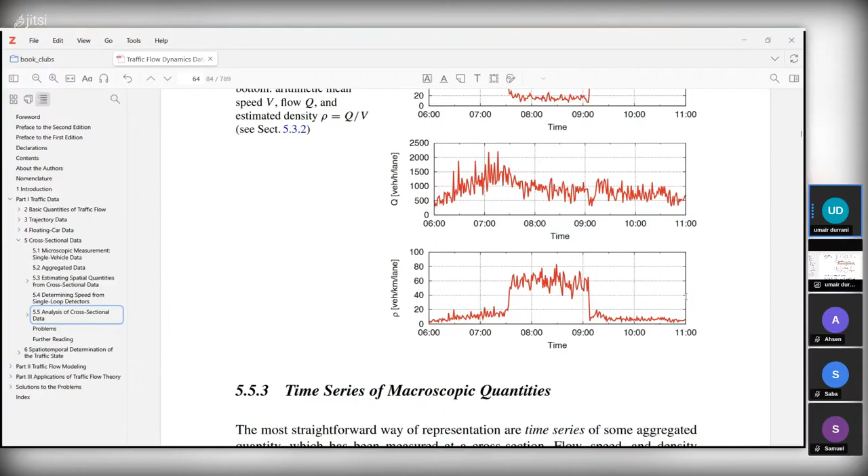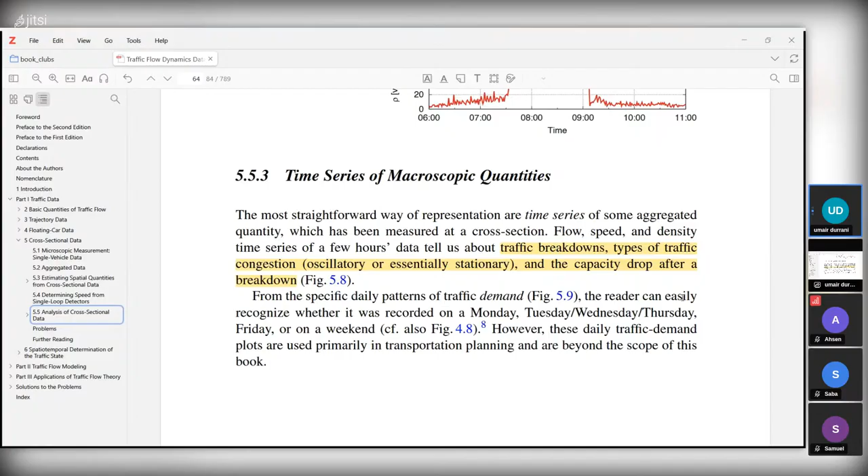So stationarity is, just to remind you, a concept from statistics where we are assuming that the distribution of whatever variable we are interested in is not changing over time. So for example, if the distribution is a normal distribution, we have two parameters, the mean and the standard deviation. And those two parameters are not changing over time. So the distribution remains the same. And in this particular context, we are talking about the variable of speed.

So in this section of the time series, we have these plots. On the top figure, we see speed over time, then the flow over time, and then the density over time. And we can see that there is a drop in the speed, a drop in the flow, and an increase in the density at this point in time. This is around 7:30 a.m.

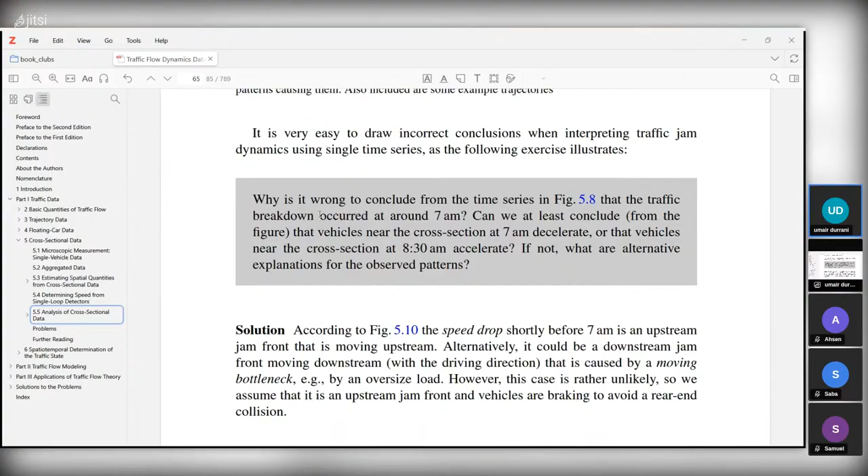So the question that is asked in this section is, why is it wrong to conclude from the time series in figure 5.8 that the traffic breakdown occurred at around 7 a.m.? So looking back, this is 7 a.m. And the question is saying, why is it wrong to conclude that traffic is breaking down around 7 a.m.?

So apparently, looking at just a single detector's time series of speed, flow, and density, it does seem that the traffic breakdown started around 7 a.m. And clearly at 7:30 a.m., there is a big drop in speed as well as in flow and an increase in density. So why is it wrong to conclude that?

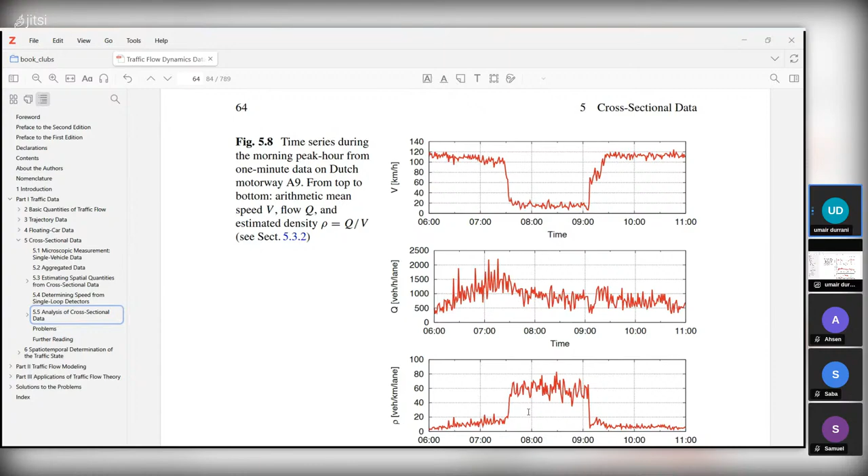It's because there could be multiple explanations of what is happening as well as where it is happening, both in time and in space. So if we have multiple cross-sectional data, so we have multiple cross-sections, loop detectors at certain intervals, and we get data from them at the same time, then we can compare what is happening upstream and downstream, and that tells us a complete story.

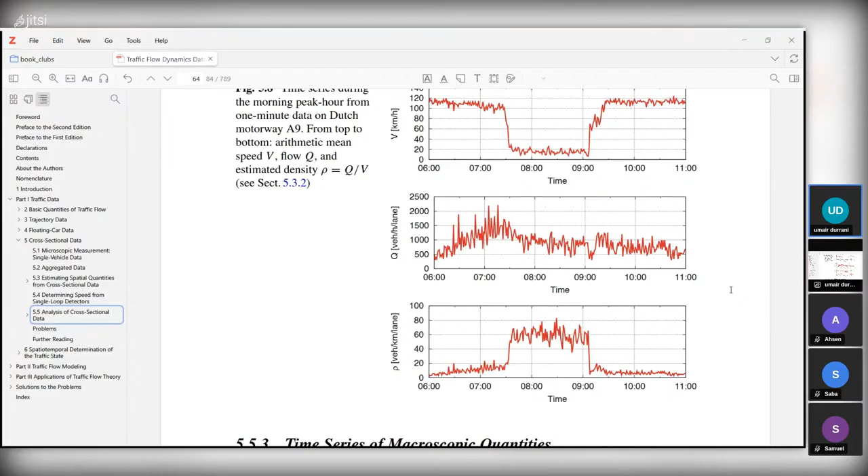Looking only at a single detector's data may be misleading, and that may mislead us into the conclusion that there is a breakdown starting at 7 a.m. So in this section, they have explained that there could be two possibilities. One of the possibilities is, although that figure above is about a highway, if we see the same pattern around an intersection, then one of the explanations could be this.

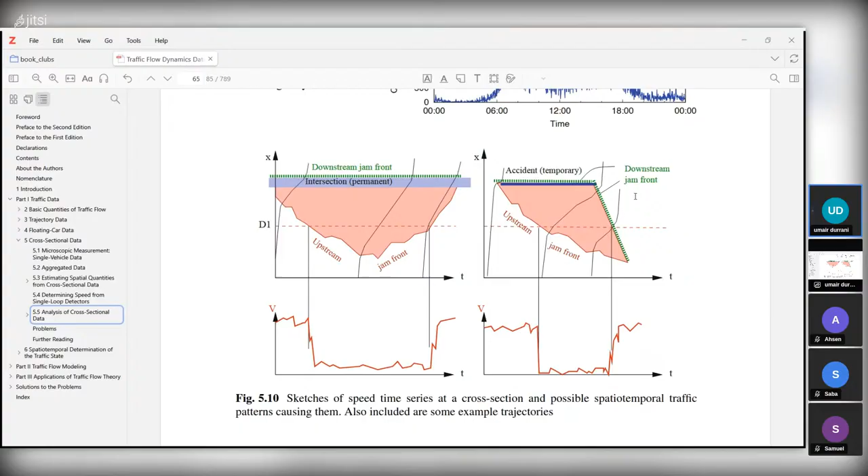Another possibility is if there's an accident, and this could happen either on an intersection or on a highway. And there, the problem is downstream jam front and then downstream congestion. And so if there's an accident, vehicles need to slow down. Or if there's a blocking vehicle, which is also mentioned in this section, that could be a large truck, which is slower than the cars. That is also creating a bottleneck, but it is a moving bottleneck. As a result of that, it will continuously increase or create the breakdown downstream as it moves. So there are multiple possibilities.

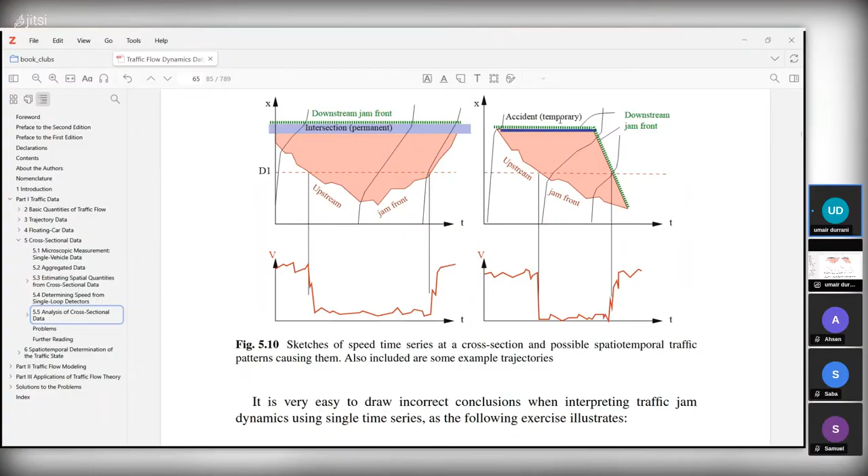This question was here as well. Can we at least conclude from the figure that vehicles near the cross section at 7 a.m. decelerate, or that vehicles near the cross section at 8:30 a.m. accelerate? If not, what are alternative explanations for the observed patterns? So we have seen the alternative observations. One possibility is that there is an intersection and there is a downstream breakdown, and that is moving upstream. The second possibility is the same thing due to accident, or another possibility is that there's a moving bottleneck, which is like a large truck. So in that case, the breakdown will happen downstream and continue to happen downstream. So this is what is explained in the solution here.

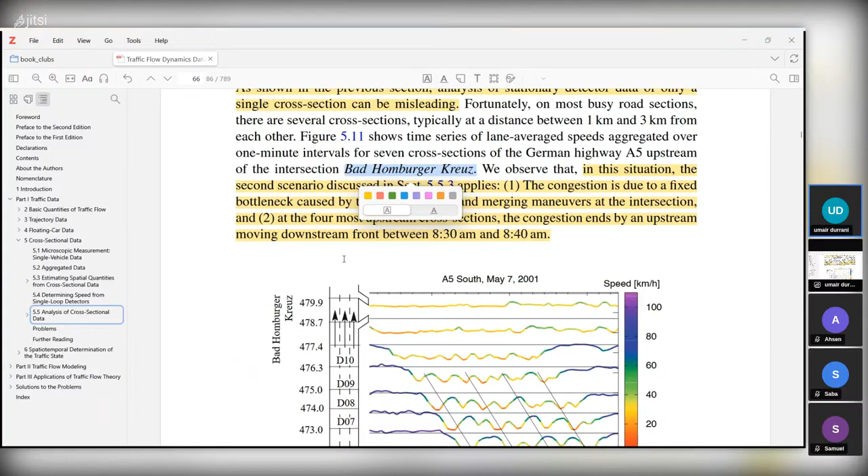And later in this section, spatiotemporal analysis, they explain using multiple detectors. So previously we only saw one, but now we have these 4 detectors, which show that there is this roadway where there's merging traffic here. Downstream of that, there is an intersection, which is mentioned right here. This is the name of the intersection. And so because of that intersection and because of the merging traffic, vehicles would change lanes and there will be some congestion and traffic breakdown. That traffic breakdown is clearly seen here as detected by these detectors.

In the beginning, there is a higher speed. So these purple speeds are around 80 to 100 kilometers per hour. And then they break down. But if you look at the minima of each of these time series, we see that they're moving in time. So this is happening at 8 a.m. when there is a slowdown observed by D10. And then here at D07, this is happening at around 8:10 a.m. So that is moving in time. And so if we connect them, we get these lines. And these represent the negative speed, also called the traffic wave, the speed of the traffic wave, which is happening due to these breakdowns. So that was the actual explanation of the question that was asked in the previous section.

Any questions or comments at this point? Yes, I have a question. So the breakdown starts at D10 at around 8 o'clock, and then it arrives at the detector D07. This seems like around 10 minutes later, right? So this is quite a long time for a breakdown to propagate. What could be the explanation for this?

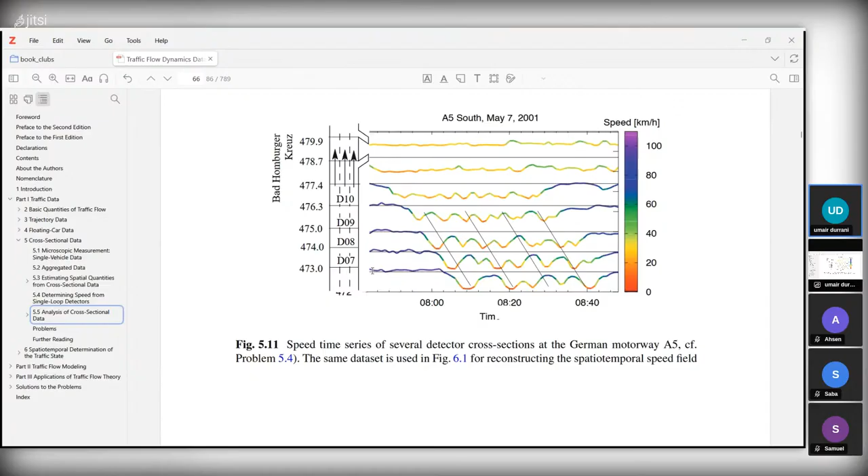So for example, if we talk about the detector D07 and D10, which are labeled here, and we are only looking at these two time series. So this is for D07 and this is for D10. For these two time series, we have multiple data points, as we can see in the figure, and we can estimate the correlation for these two detectors' speed. So that is represented by K for one detector, for example. That could be D07 or D10.

So let's say K is D10. So that is the time series of the macroscopic speed. In this case, it's the arithmetic mean speed. And then we also have the time series of the other detector. In this example, that would be D07. So we have D10, D07, their speed time series, and then we are finding their correlation. So if we use this correlation coefficient, that tells us the speed cross correlation function that can help us determine the wave velocity.

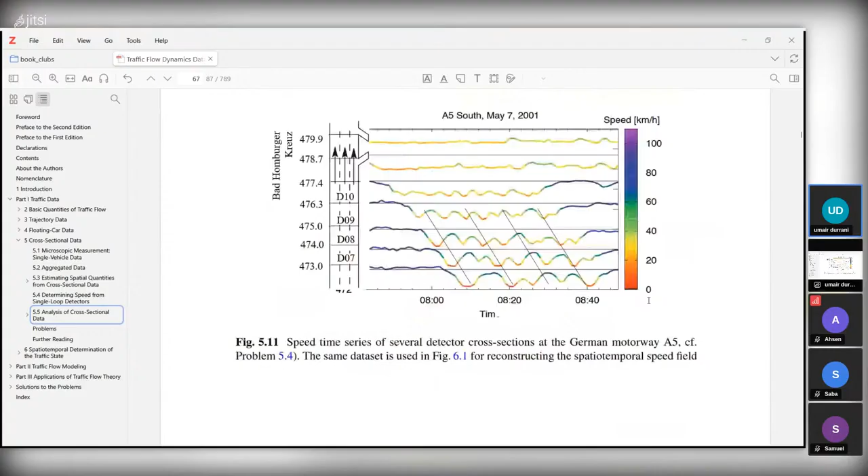Another way that they've shown here is this formula where we look at the distance, delta x_kl, and the time. For example, let's look at this one. So for D10, this is around 8 a.m., just before 8 a.m. And this one, the minima here is at almost 8:10 a.m. So the difference between them in time is 10 minutes. The difference between them in distance is 3 kilometers.

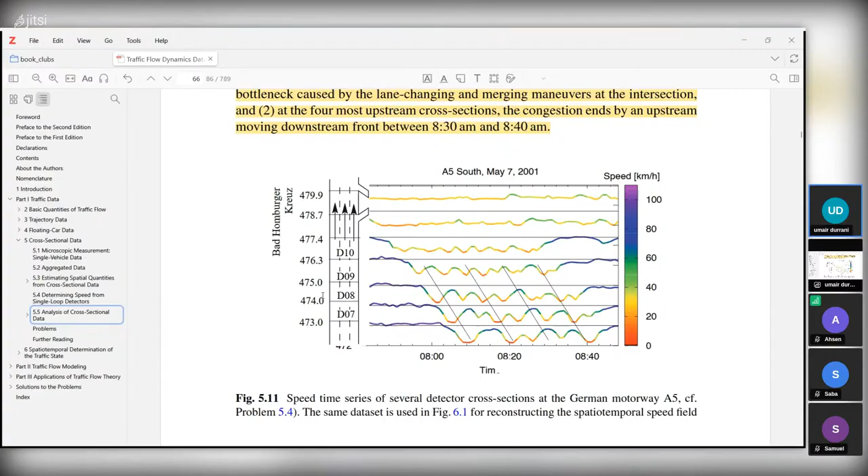So if we plug in those values, for delta x it's 3 kilometers. For tau, that would be the 10 minutes or so. That would give us the wave speed, the speed of the traffic wave. And here they define delta x_kl as the distance between the detector stations.

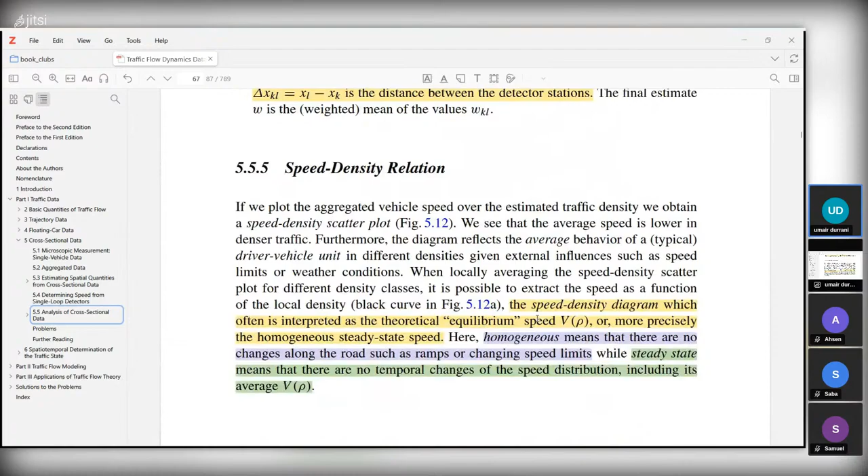I think there is an example here as well. Let's see. I think they mentioned problem, or maybe it comes later.

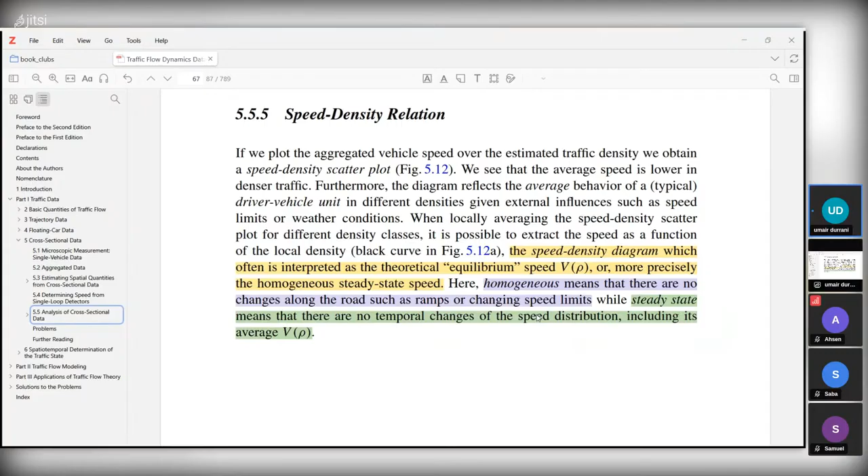Anyways, so next section is about speed density relation. And this is what contributes to the fundamental diagram discussion. So speed density relation is about these plots. So let's look at this one first. I'm going to zoom in, and the x-axis here is density, and the y-axis is the macroscopic speed.

Now, this macroscopic speed, again, is the arithmetic mean speed, which means that you have a detector. On that single detector, for a time delta t, for example, for 60 seconds, you count how many vehicles are crossing that detector, and also find what is the speed of each of those vehicles. We have previously discussed that that is available to us directly from the detector. So those are individual speeds.

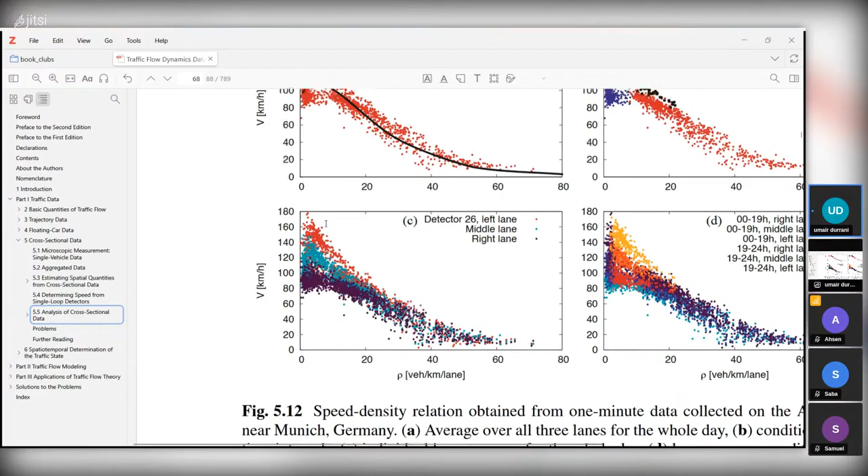If we take all those speeds and then take an average of those speeds within the observation of 60 seconds, that will give us a single data point of macroscopic speed. And if we then estimate density using the previous discussions we had on estimating densities, it could either be flow divided by this macroscopic speed v, or it could be flow divided by the harmonic mean speed, depending on the stationary versus non-stationary conditions. We have different formulas and we discussed them in the last session.

So once we know what density is, which is also a macroscopic quantity for those 60 seconds, and we also have this macroscopic speed, we can now have individual data points representing those, and we can then plot them.

So these red points represent all those points. These are averaged over all the lanes. And this is, in this case, particularly for detector number 26. And then there's this black line, which is fitted on these data points. The black line is not coming from the data. It is just a model fit to the data.

So my question here is, what do you see in this line? What is it telling us? What is the pattern that you detect here? Any ideas? As density increases, the speed decreases.

Yeah, so as we see, as density increases, as properly put, the speed decreases, which, if we think about it intuitively, makes sense as there are more vehicles in a particular delta x. Their speeds have to be slowed down because otherwise we won't have as many vehicles together.

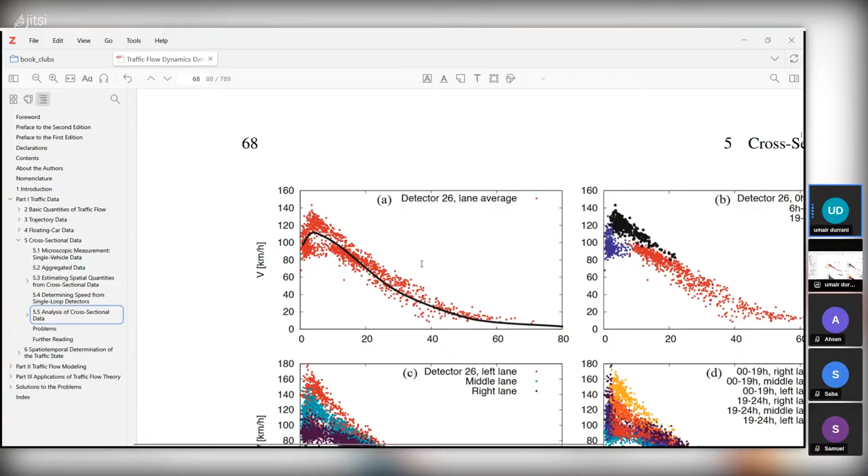Does that mean when density is almost zero, the drivers themselves are disciplined enough to not use the maximum speed they can? The maximum speed comes later at a higher density. Why don't they go at the highest speed when there's almost no one on the road? So this is a question that, looking only at this plot, would come up. The explanation is on the right.

This is showing us the breakdown of the same data points using the time. So we have 0 to 6 hours represented by these purple data points. Then we have 6 to 19 hours, which means 6 a.m. to 7 p.m. in the evening. These are the red data points. And then 19 to 24 hours are the black data points.

So here we can see that there essentially are two clusters of the speeds on the same range of density. We see some of the speeds are just above 80 kilometers per hour, and some of them are at 100, some of them are just above 100 and 120 between them. So these represent, as the chapter explains, the speeds of trucks and cars.

And for the other two data points, we see the same pattern as discussed here. As density increases, the speed decreases. Only in this part, we see this kind of cloud, representing vehicles moving at their desired speed. So they don't really have a correlation with density here because density is very small, so they don't really care. They go at their desired speeds, and they're limited by, obviously, the speed limit.

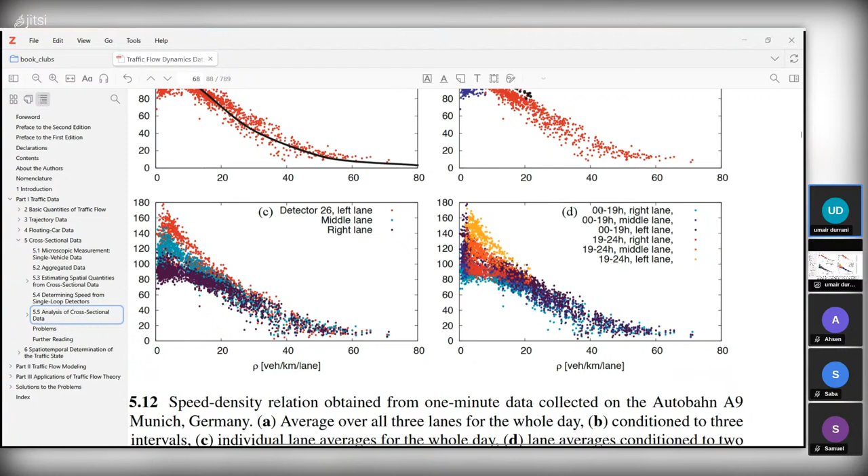This line that we see here, when we are not discriminating between the times when the data points were generated, this line is called the speed density diagram. And so this is a theoretical equilibrium speed, which we can determine using, so this complete plot is not the theoretical equilibrium speed, sorry. This part where the speed is decreasing, this would represent the theoretical equilibrium speed.

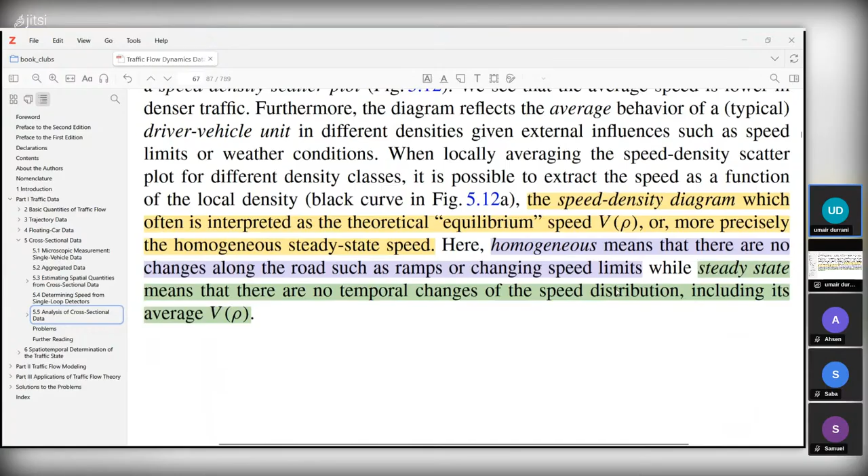And the whole line here, the black curve, this is the speed density diagram. So let me read this so that it is properly mentioned. The speed density diagram, or I should read from here. When locally averaging the speed density scatter plot for different density classes, it is possible to extract the speed as a function of the local density.

The speed density diagram, which often is interpreted as the theoretical equilibrium speed, V of rho, or more precisely, the homogeneous steady state speed. Now they have defined what homogeneous means and what steady state means. Homogeneous means that there are no changes along the road, such as ramps or changing speed limits. So essentially, the road geometry remains the same. And steady state means that there are no temporal changes of the speed distribution, including its average, V of rho.

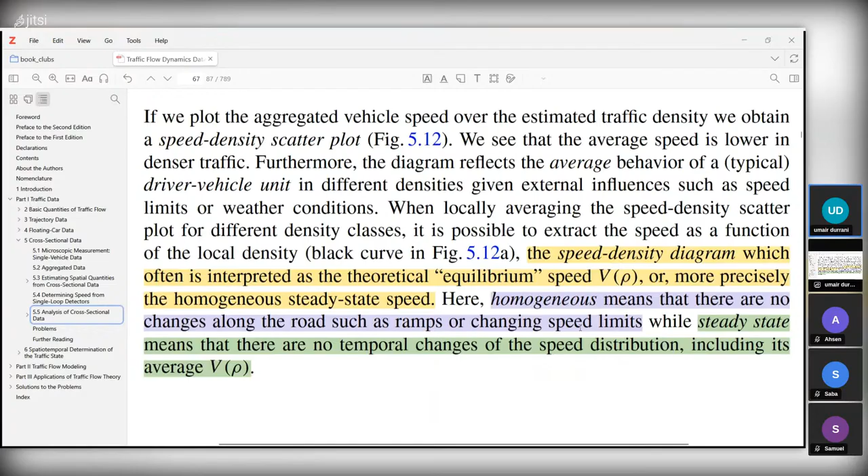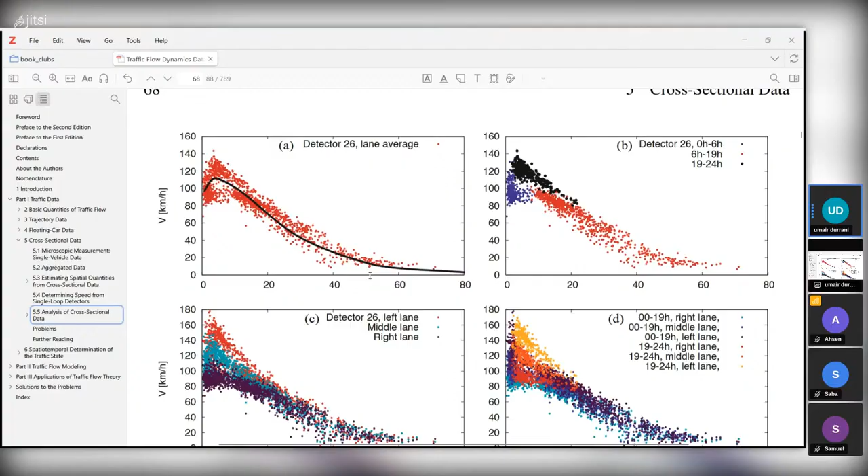So this definition of steady state seems to me the same as the definition of stationarity, which is a statistical concept. But the concept of steady state is a traffic flow concept. So again, steady state refers to no temporal changes of the speed distribution. Speed distribution would remain the same. So this is why this black line is theoretical. This is just fit to these data points, and generally people have figures, which I'm sure we will discuss in the part of traffic flow modeling, where they have models that represent these lines using different equations.

Okay, any questions?

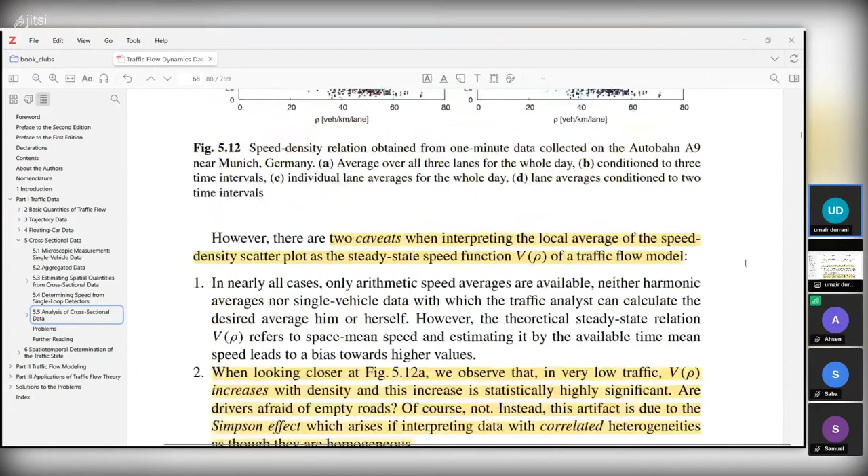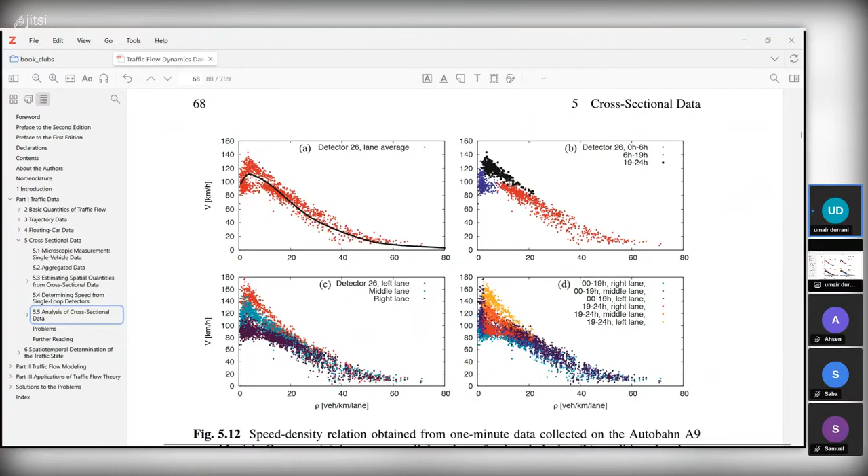One term that they have mentioned here is the Simpson effect. And so the Simpson effect is this thing where once we broke down the data points by time, we see a completely different pattern. That's what Simpson effect means in statistics. And other than that, they also mentioned that you can determine the desired speed from this when the density is very low. Then you would say that the higher speeds that you're getting here, those are the desired speeds of the drivers.

And this is also important that we conclude that speed density scatter plots depend on the vehicle fleet, which means the traffic composition. Other factors are regulations, variable speed limits, external conditions, which also includes weather conditions. And this also applies to flow density and flow speed plots that we are going to discuss next. So questions, any confusions?

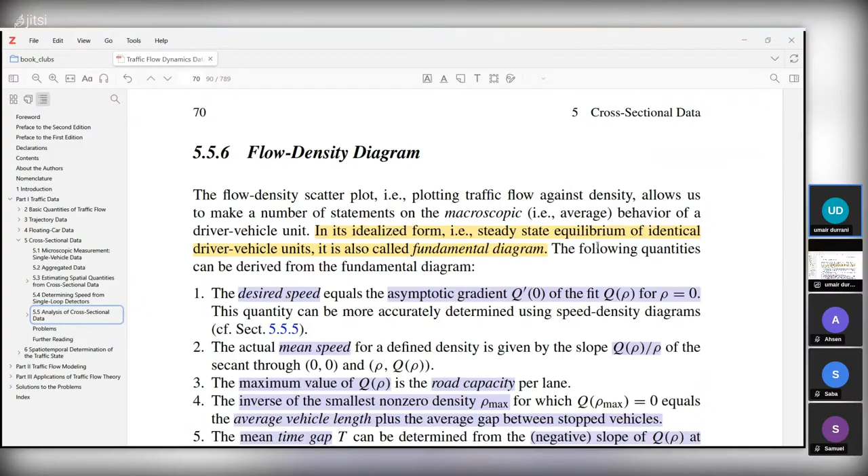Fundamental diagram would mean that your traffic flow contains identical driver vehicle units, which obviously is not possible in real life. And it also assumes that there is steady state equilibrium, which means that the speed distribution is not changing over time. It's remaining the same because everyone is going at the same speed, not accelerating at a given gap. They are at a given gap that they're keeping from the lead vehicle. They are moving at the same speed throughout. That would mean fundamental diagram. Which does not mean that the speed cannot change. The speed can change, but if the speed changes, it is changing based only on the gap that they're keeping.

And we can define certain things using these diagrams. We can define the desired speed, which is equal to the asymptotic gradient of the flow when density is zero. So when density is zero, we are right here, which means that we are talking about this free flow or free traffic branch.

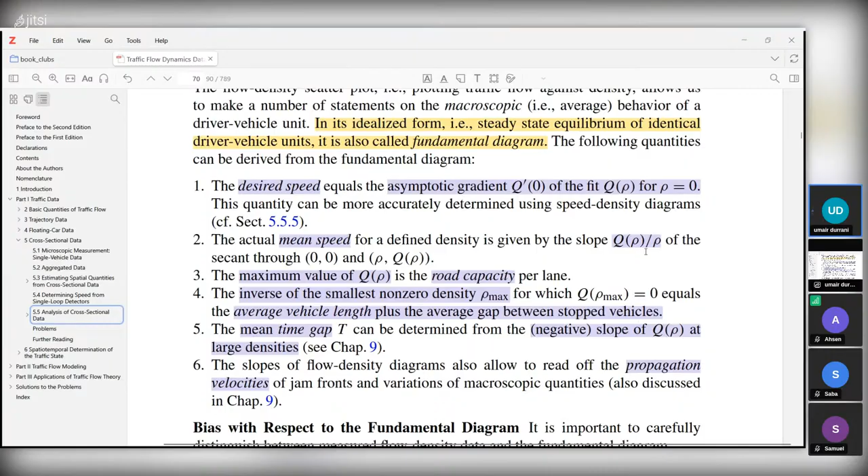If we take a slope of this, that will give us speed, because remember, density is equal to flow divided by speed. So if we take a slope here, that would give us the speed, and that would be the desired speed. We can also estimate the mean speed for a defined density by getting the slope again. For other parts of the plot, we can use this formula to get the mean speed.

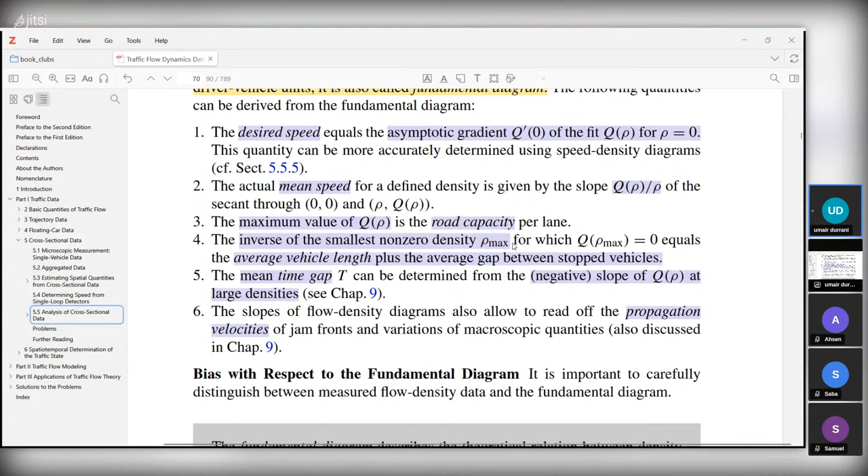And this represents, if you recall from our previous discussion, density is equal to 1 divided by average distance headway. Vehicle length plus gap is also equal to distance headway. So 1 over rho max then represents average vehicle length plus average gap. Okay. Any questions?

Okay, and then we can also get the mean time gap, capital T, which can be determined from the negative slope of the flow at large densities. Then the slopes of the flow density diagrams also allow us to read off the propagation velocities of jam fronts, but this part is not very clear in this section. So they are going to talk about both points 5 and 6 in chapter 9.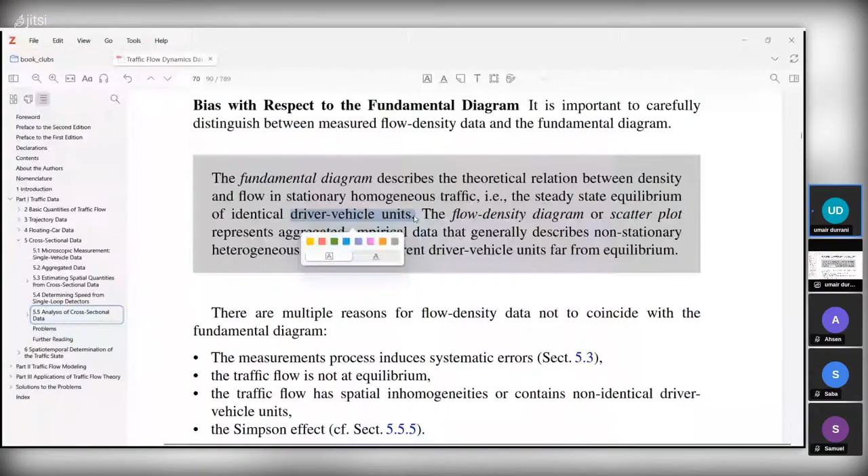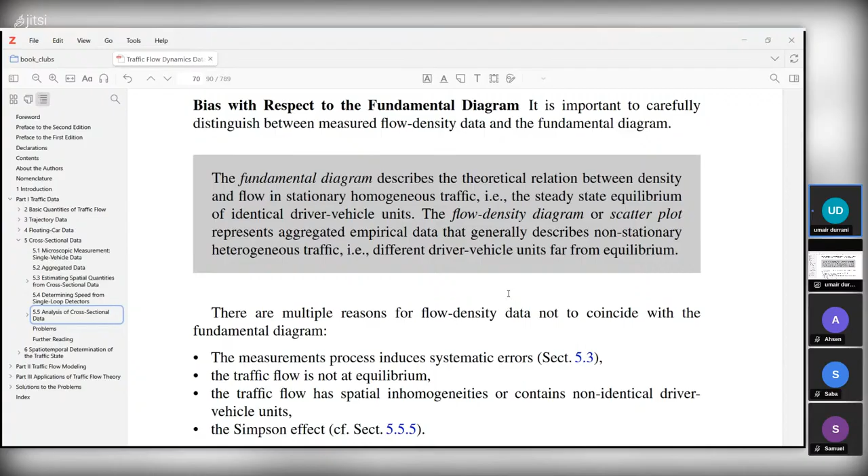The flow density diagram, on the other hand, represents aggregated empirical data that generally describes non-stationary heterogeneous traffic, that is, different driver vehicle units, which are far from equilibrium conditions.

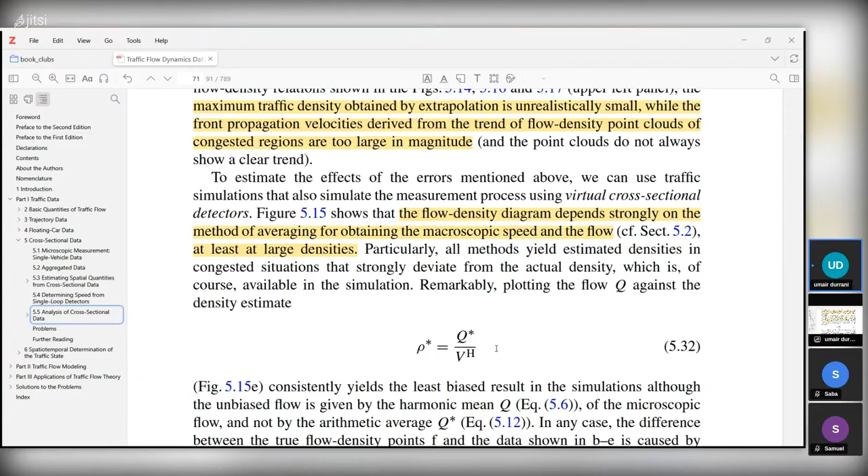They also mentioned that if you use the hydrodynamic relation of rho is equal to Q over V, there could be some bias. So instead, you can use this formula, Q star divided by harmonic mean speed. Q star is equal to 1 divided by the summation of flow, I think, the microscopic flow. We have previously discussed the equation for Q star. Let's see. Here is 5.12.

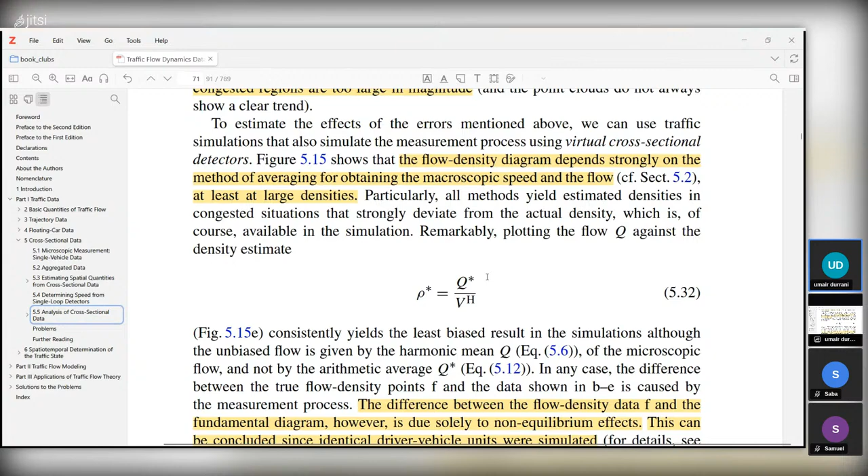Yeah, so this is the average of 1 divided by the time headway, or the average of the microscopic flow. So it's not a sum, it's the average of the microscopic flow. The easier one for me to remember is this one. It's the average of 1 divided by the time headway. So this, according to the discussion, is a better approach to estimate the density.

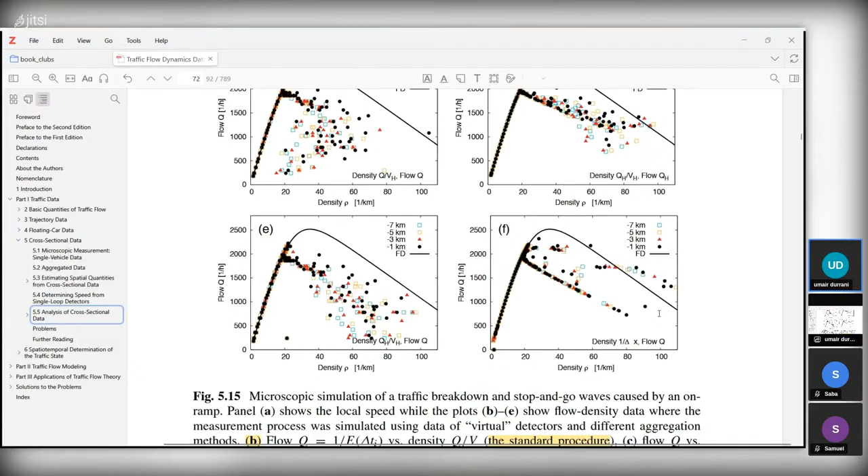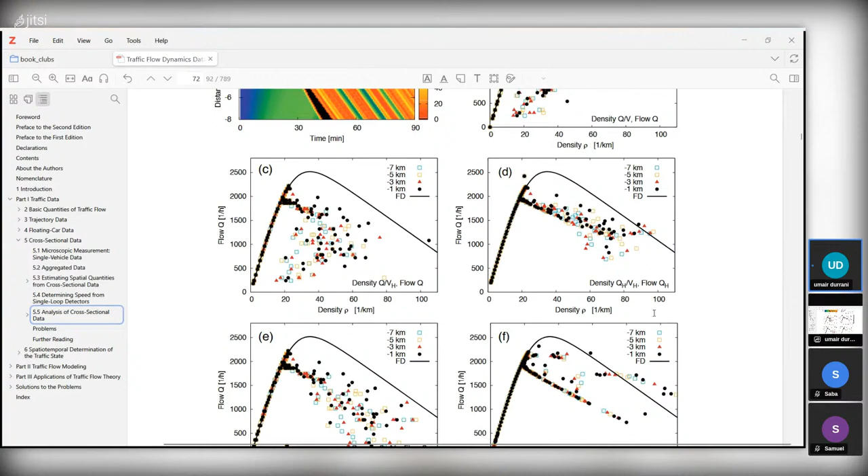Okay, so now we are in this discussion of using density and flow, so flow density plots, and this is simulating highway traffic. So how they generated these plots is from a simulation using their own software called MovSim. So let me now show you that. I'm going to stop sharing this screen and let's share the complete screen.

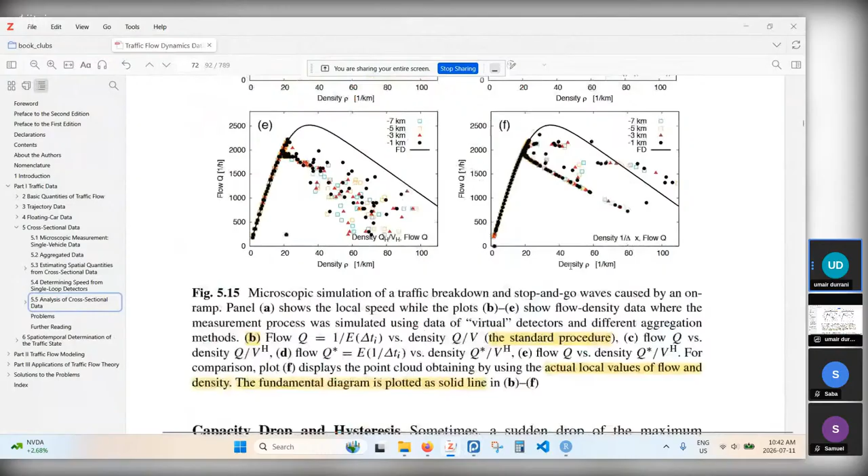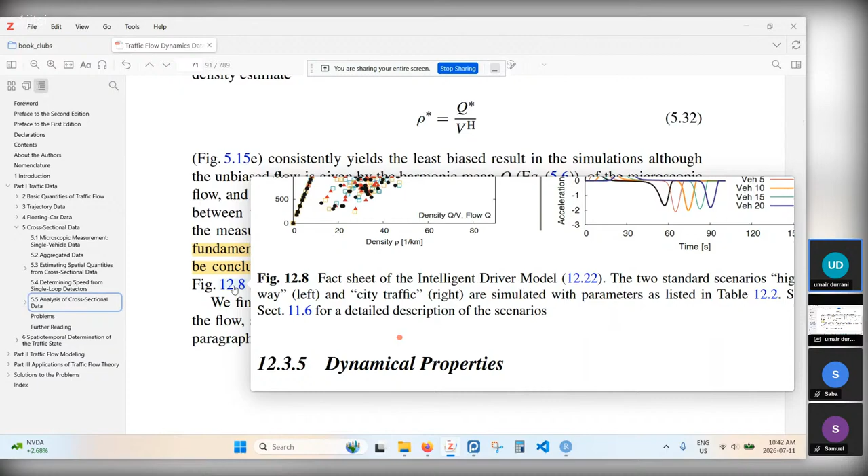So we tell it what files we want to run. So we want to run this file onramp_idm.xprj. And this is coming from, again, the book scenario simple on ramp. Let me first explain to you what that scenario does. So if we go to the figure 12.8, this is the result in chapter 12 for the intelligent driver model, and it's showing us a similar figure.

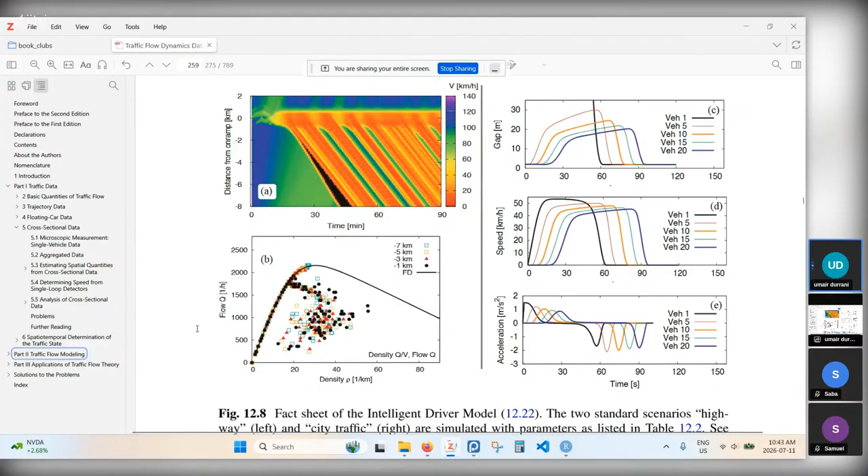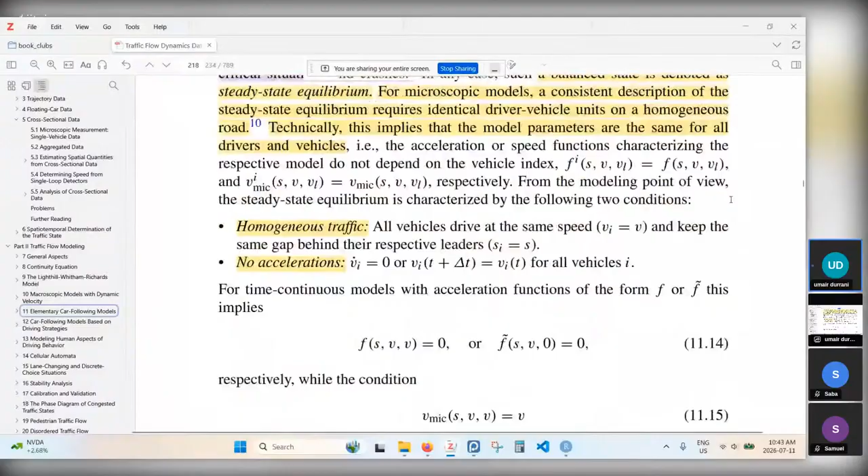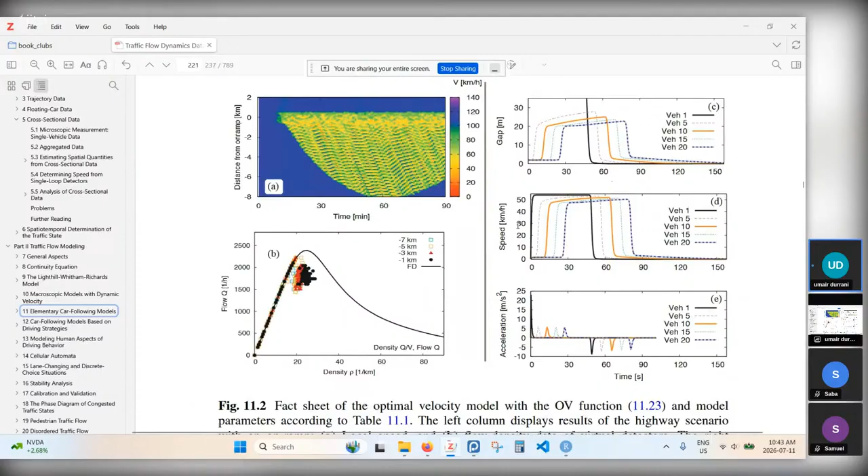And if we now go to chapter 11, this is where they have explained that particular simulation. So here, the fact sheet of dynamical model characteristics, they have this section highway scenario, and within highway scenario, they explain what the scenario is about. So in this case, they have lane changes allowed, which take place in 1 kilometer long merging zone of the on-ramp centered at x equals 0, right? So there is a long single freeway lane, and then there is a merging zone which is 1 kilometer long.

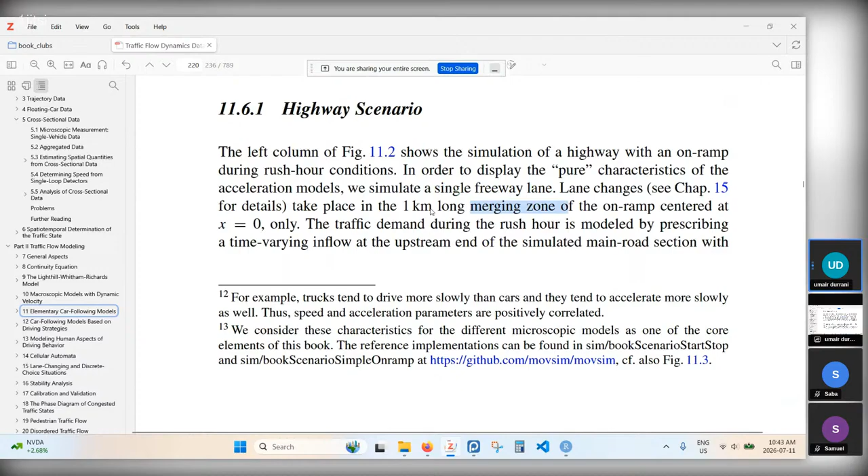And then the peak value of the flow is 2,200 vehicles per hour. On the on-ramp, the flow is 550 vehicles per hour. So it doesn't change on the ramp, but on the main highway, it does change. So how do we know how much flow there should be? That is provided in the file. If we go to onramp_idm.xprj, here we can see that it provides the flow at time 0, starting point. The flow is 200 vehicles per hour. And then at time 1500 seconds, the flow is 2200 vehicles per hour.

Initially, the speed is 30 meters per second, which is just below 120 kilometers per hour. And then it goes to 22 meters per second. And for the ramp, the flow remains 550 vehicles per hour. So we need to run this, and we need to run this in the same directory as MovSim. So I'm going to copy that here. I'm going here, go to the main MovSim directory, and then right click, click on open in terminal, and I paste that here, press enter.

So it's going to launch this GUI for us and start the simulation. If we zoom in, this is showing us this part. Interestingly, we don't really see the on-ramp here. And that's the choice that the authors made. Although they are simulating the on-ramp, physically we don't really see it in this simulation. So it takes some time to run it. You can see it here. Once this is complete, this progress bar would show that the simulation is complete.

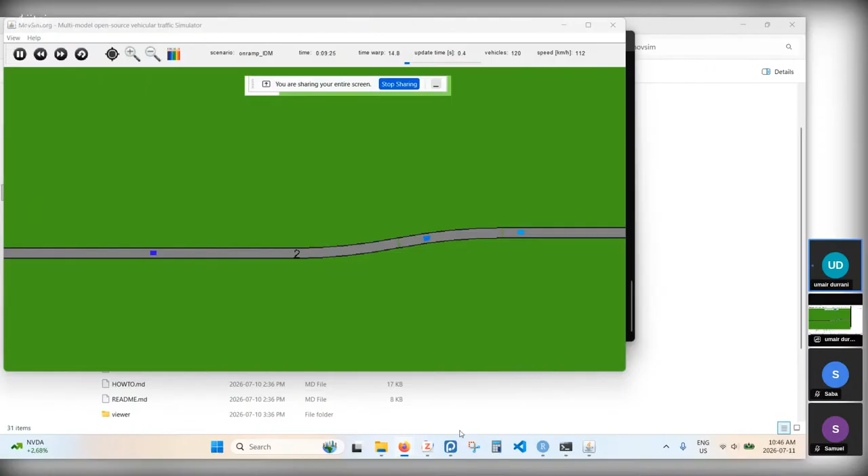And then once it is completed, it would then generate multiple detector data sets, because there are multiple detectors on that roadway upstream of the on-ramp. So they will be generated here. And once they are generated, then the authors use this file. All of these commands are the gnuplot commands that would use the data that I just showed you and then create the plots. So I've already done that. And after that, if I go to sim and then book scenario simple on ramp and then plots, this is where we can see those plots.

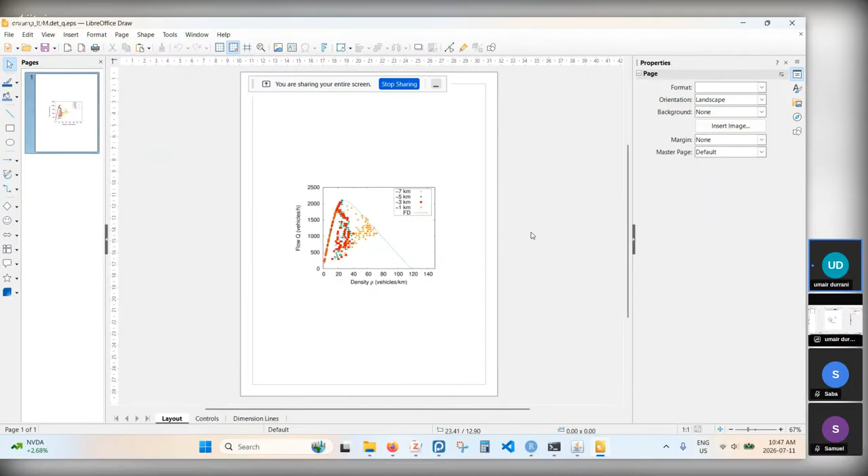I'm going to open this, but it should not be this one, but it's okay. This one also works. And let me zoom in. So this is what the plot shows us. Now let's take a look at what we saw in the chapter.

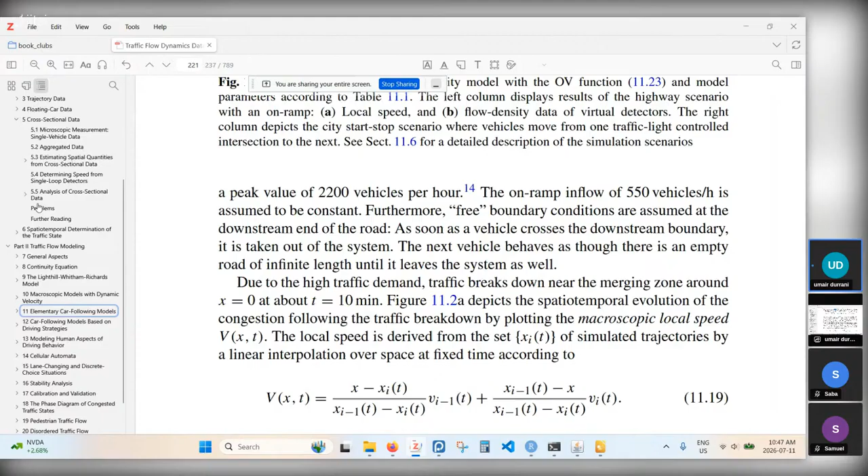So I go back to the analysis of cross-sectional data, and at the very end of this chapter, we'll see those plots right here. So the first plot is showing us time on x-axis and distance from the on-ramp. So 0 means that this is exactly on the on-ramp, and this is upstream of the on-ramp, and this is downstream.

And so upstream, because of the traffic, if you take a look here, we see that vehicles are slowing down a bit, right? As they're moving along the ramp, they're slowing down a bit. And over time, you will see even more slowing down, and this will become a bottleneck. So that is causing the upstream congestion. So the red and orange colors here represent traffic breakdowns.

The first one here is using the formula of flow of 1 divided by the average of time headways. That's the formula of the flow that is used on, sorry, y-axis here, and on x-axis we have density, which is estimated using Q over V right here, right? So the flow is defined like this. So that's the plot, right?

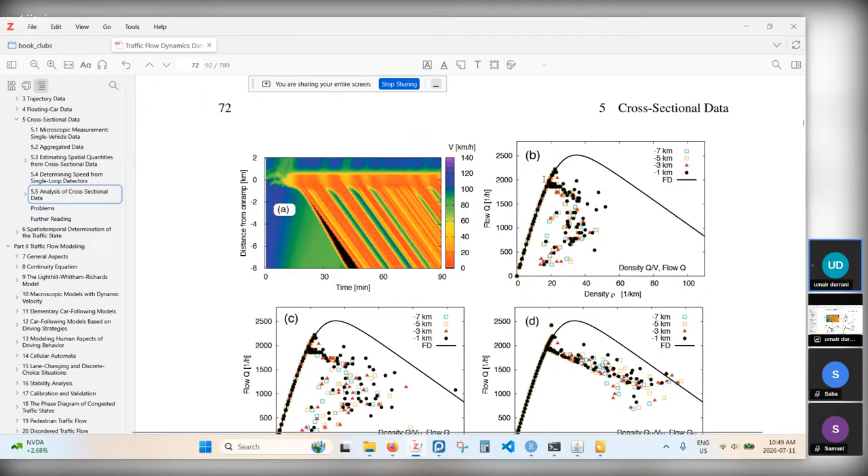But the actual data points, although plotted on top of the fundamental diagram in free traffic, in congested traffic are not even close to the congested fundamental diagram. Here we see these point clouds, and the maximum density they go to is less than 60 vehicles per kilometer. But these sets of plots also tell us that using different formulas for estimating flow and density will give us different results. You can clearly see these different results.

This last one here is directly from the detectors that are available in the simulation. This is the flow using the definition of flow, the number of vehicles at a particular location for a given unit of time. And the unit of time here is 60 seconds. The density rho is the number of vehicles in a kilometer, right? So this is directly available from the detectors in the simulation.

And these are making a very similar figure to the fundamental diagram. So we have the free traffic and then the congested traffic, this line. Yes, there are some outliers here, but I wouldn't say these are outliers. There are other point clouds here, but we see the clear pattern, just like the pattern in the fundamental diagram, although the density is smaller than what the fundamental diagram suggests.

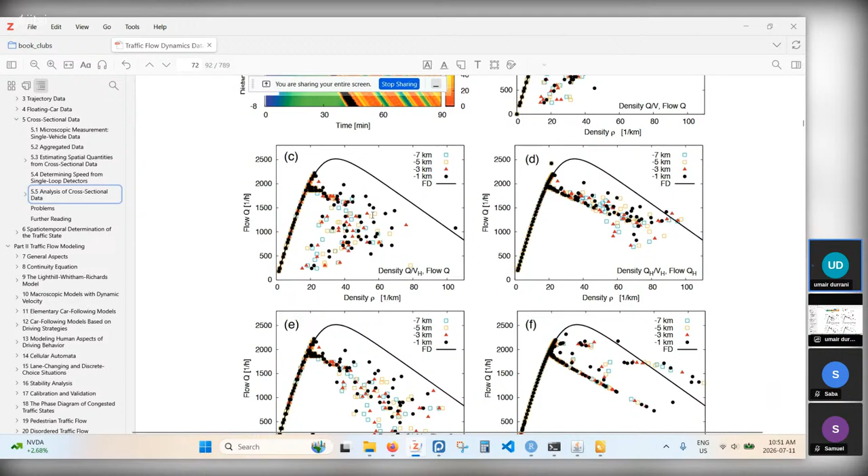But then in plot C, we have flow Q, again estimated as this formula, versus density using flow divided by harmonic mean speed. So this is C. This is what we get. A different interpretation here because the plot is different.

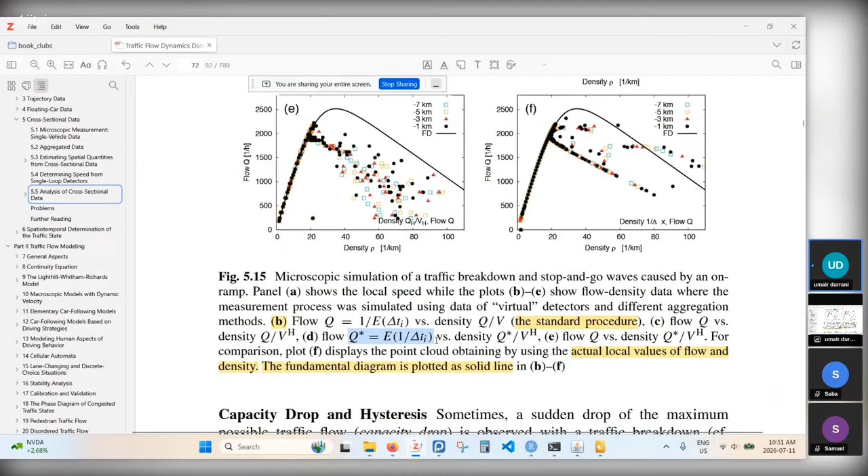In part D, we have flow, which is Q star. So this is the average of 1 divided by the time headways. And the density is Q star divided by harmonic mean speed. So that's D. Right? Again, a very similar pattern to the fundamental diagram. So this seems to be a good estimation because we're using harmonic mean speed, which we know is a better representation of space mean speed, and flow is also a better representation of the actual flow.

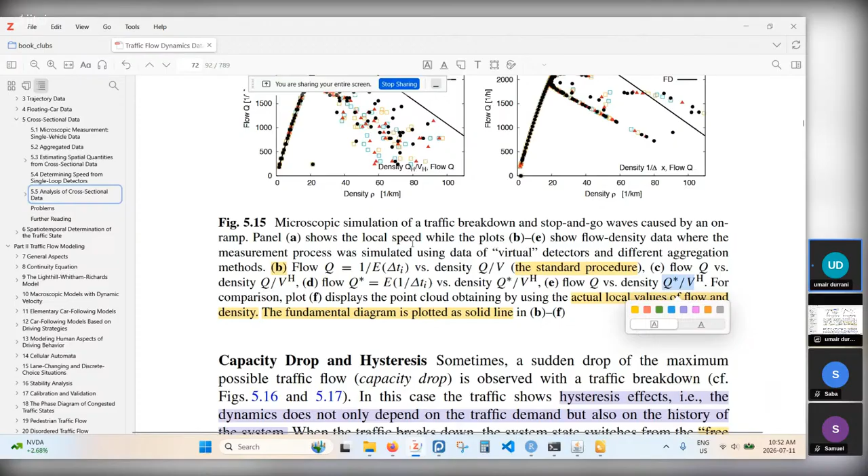And then we have part E, which is using the flow as this definition and density as Q star over VH. So every single one of these plots gives us a different result. So that's why it's important that we know exactly what definitions we are using for flow and density.

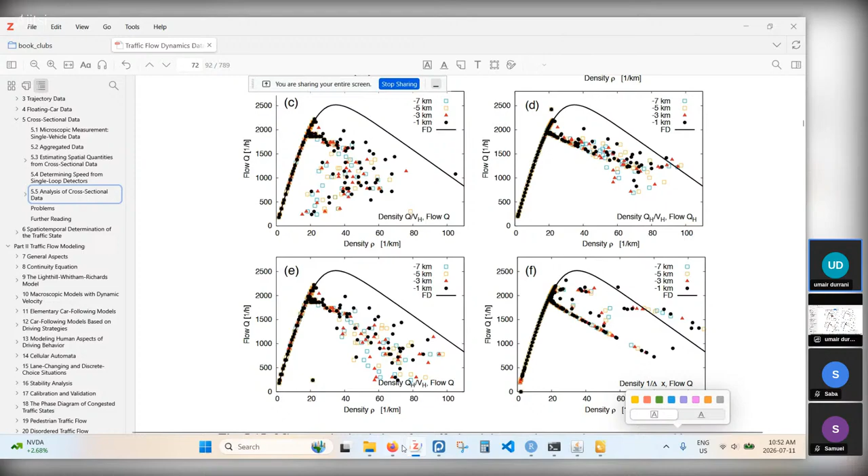And I have already emailed the authors as to why we see these differences. I have made sure that the IDM model parameters that we have used are the same as mentioned in the book. It's in table 12.2, I think, in chapter 12. So we are using exactly the same things, but we are getting somewhat different results.

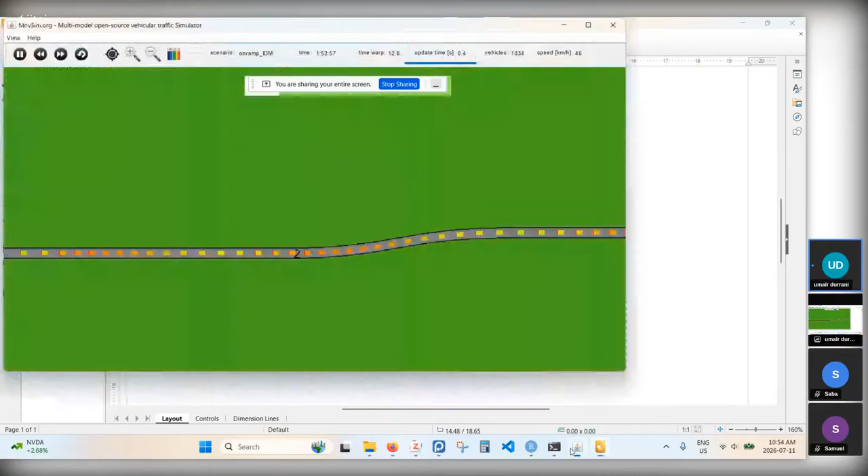The second part that I want to show is reproducing the same thing with SUMO, which I find much easier to follow because I can also see the network much clearer. It's unlike what is shown here where we don't really see the on-ramp. So I'm going to close this and it would automatically close this as well. And let's see if anyone has any questions first.

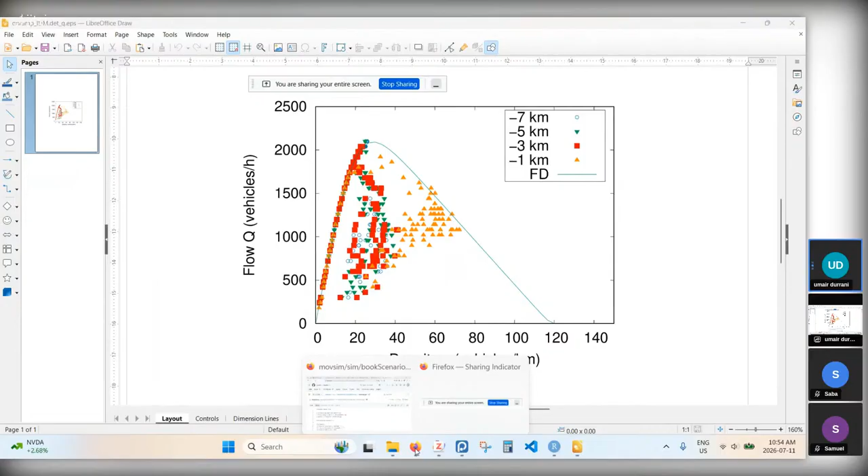To reproduce this at your end, you need to have Python installed. You also need to have the UV framework as a package manager in Python. Once you install UV, you can then just type uv sync in your IDE. So if I do that in the terminal, uv sync, it will install everything that we need from Python. And actually in this case we are not really using Python, so you can completely skip this.

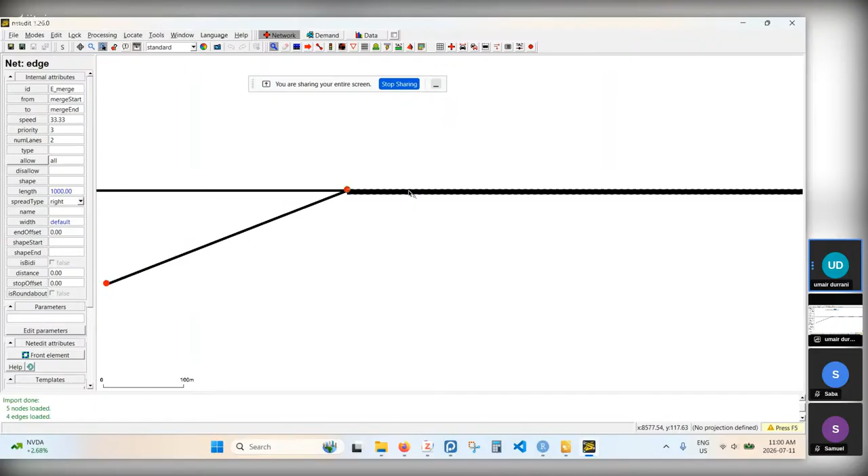Looking at this again, obviously we enter the vehicles from E up and also from E merge, and then they enter here. They enter on this lane or either on this lane, and then they leave from this final edge here. This one is called E down, right? So that's what the route should be.

So we first create a vehicle type. In the vehicle type, we tell it to use the car following model of IDM. The length of the vehicle is 6. This is using the same parameters from MovSim. Min gap is 2.5 meters. Maximum speed is 33.3, which is 120 kilometers per hour. The acceleration parameter of IDM is 1.1.

Deceleration is 1.5. The reaction time is 1.2, and it's actually not reaction time, it's the IDM parameter T, and the delta is 4, which controls the acceleration. Sigma equal to 0 means that all driver-vehicle units are identical. Then we define the route. The main route will contain those three edges, up, merge, and down. And the ramp route will start from the ramp edge, then go to the merge, and then to the down.

And then we have the flow specified here. So we have the main flow where we tell that it begins at 0, ends at 1500 seconds. So this is mainly following the same explanation as in MovSim. So we have main flow and ramp flow. Then we put the detectors, and there are two types of detectors. There's induction loop detectors, which are cross-sectional. Similarly, there are other cross-sectional loop detectors, which are called instant induction loop detectors.